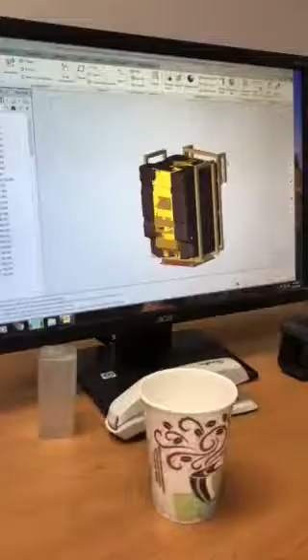This guy here, I want to highlight. Okay, yeah, I got the U right there. I'm going to turn on my planes.

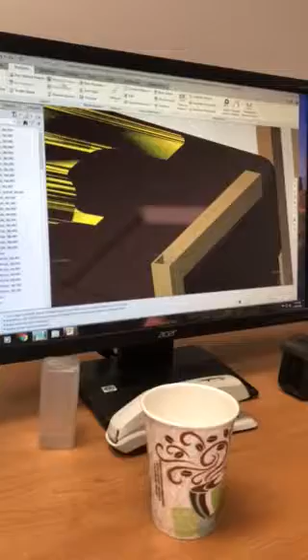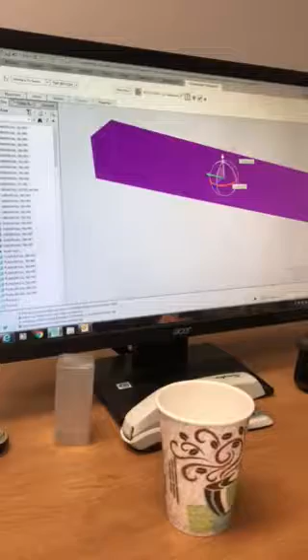So what I'm going to do is assemble U now to the front. Okay, I don't want the side there. I want to take a datum plane, that's center, so I'm going to align it to the center of this.

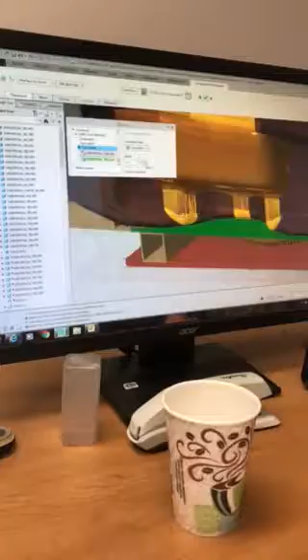Okay, and I have a distance of 2.5. Okay, there we go.

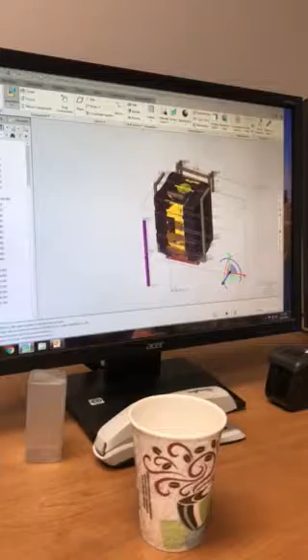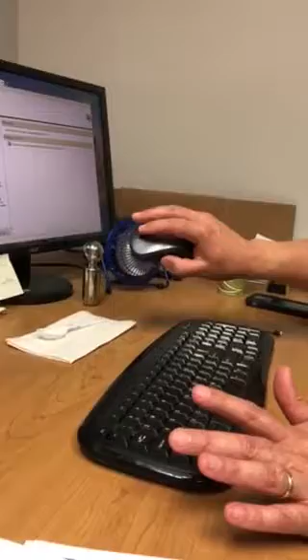Move in, move out, we use the wheel on this, so that's what that wheel can be programmed for. It can move the part in and out just as you see on the screen, which makes it nice and convenient.

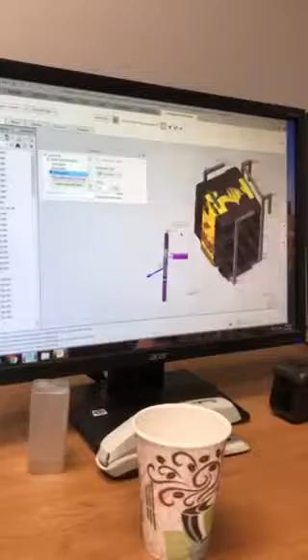It's almost like you have to zoom in to get some of those faces. Exactly, okay, I see what is going on here. See, edit that. Huh, yeah, I'm gonna have to go a little bit bigger on that, so.

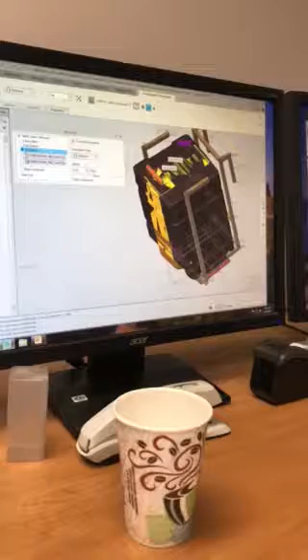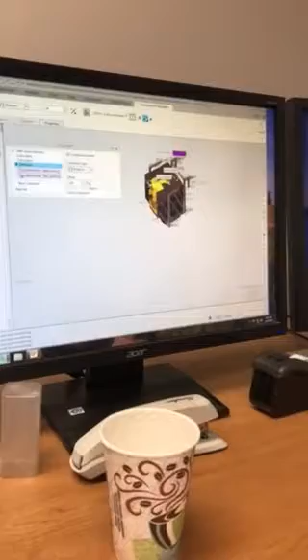And that's the distance from the top here to there. Okay, so this theoretically just shows me how much distance I have to work with, and then how far that needs to be set up to work.

So now what I do is I just say, okay, well, it's going to be this distance. Do you usually turn on your planes whenever you're doing some sort of predictive distances and whatnot? Yeah.

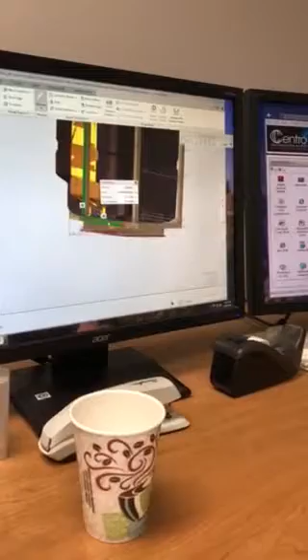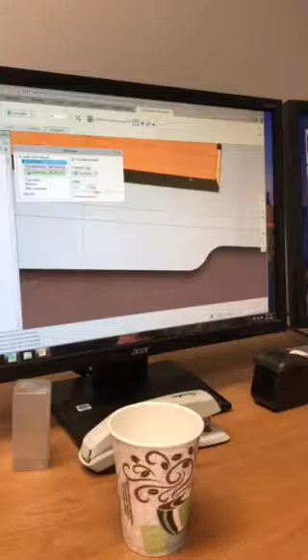Okay, so 8 inches, that should work, we should have something in there. Let's see what I got here. 8, yep.

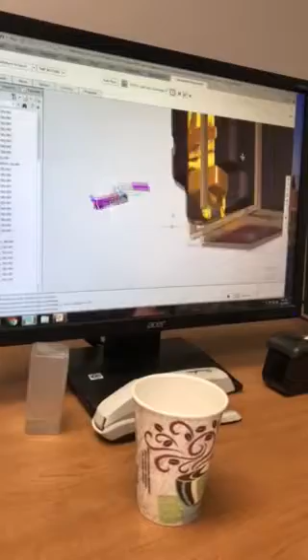You flip it around, boom, then you see where you have it right there, boom. Now you're tied back. So, yeah.

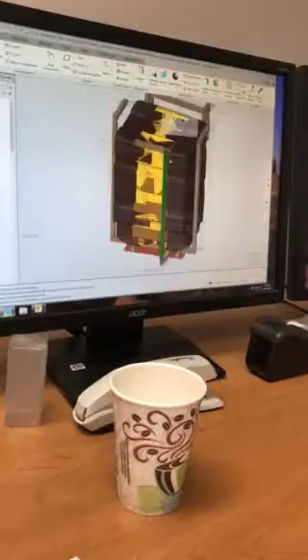Are those welds strong enough? They should be. Usually what we do is we'll even probably fabricate some gusset plates to go on here, to make sure that thing is not going to bend on you or anything like that at the base.

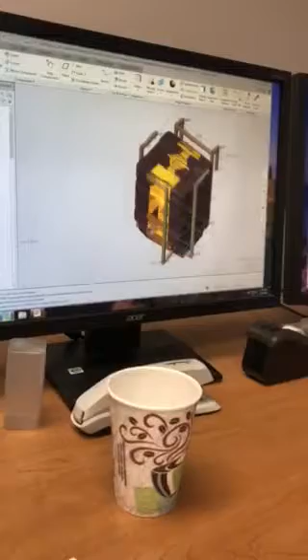Because I would assume maybe putting a tank in there. Or does this tank get pulled out at all? Yeah. Yeah, once it's finished, they'll pull it out and then they'll drop another one in.

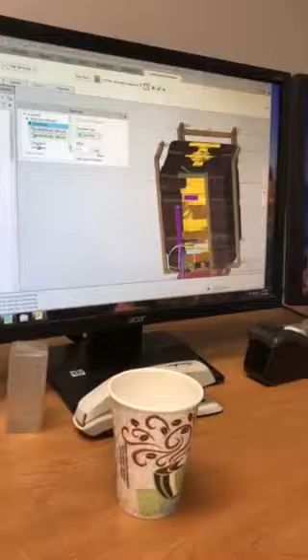Do you have to worry about tolerances for, you know, these are guiding bars is what I consider them, right? Or like how big, are they pretty big? I mean, it looks like a pretty big clearance.

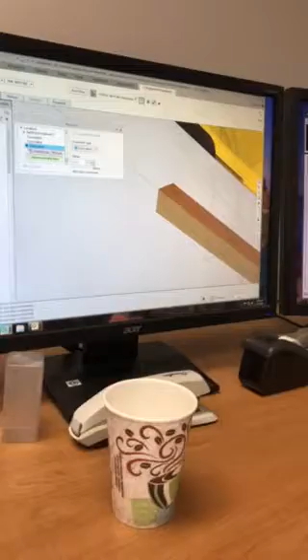Yeah, and you want that because you have shrink rates on your rotational molded parts of about 3%. So if you're dealing with that, you could be an inch oversized before you pop it in there.

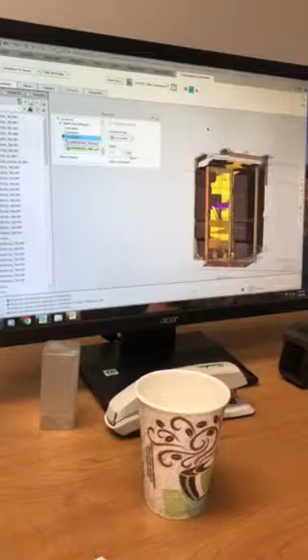So it's just a guide, it can be done fairly sloppy. You want that because these guys are going to be trying to drop this 25-pound thing in there, so they're just going to, they're going to need the room.

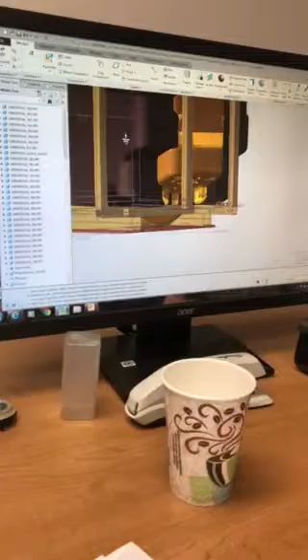You always want to zoom in and out to see where you're at.

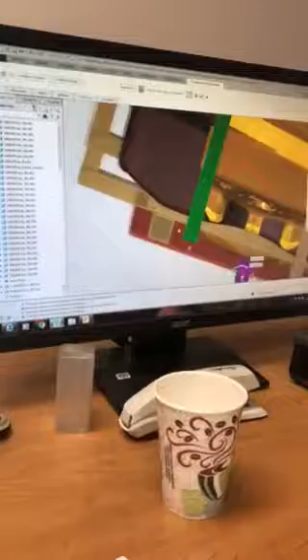So is that gonna work? Nah, not yet. So you're always seeing where you're at, so okay. And boom, okay, nice, yeah.